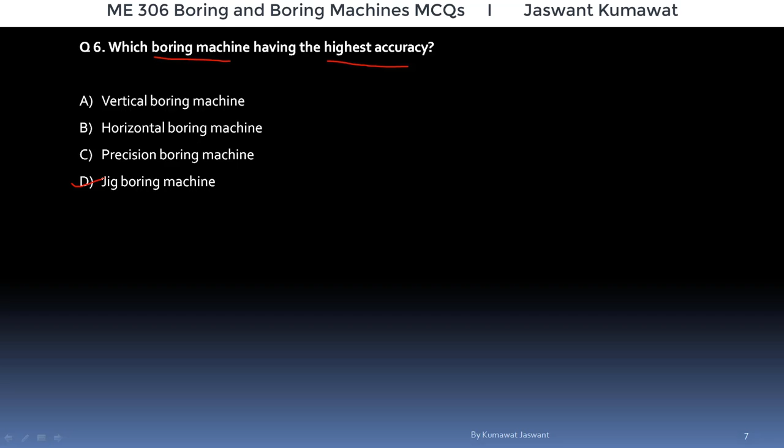Next question, number of cutting edge or cutting edges that can be used as cutter of a boring bar is.

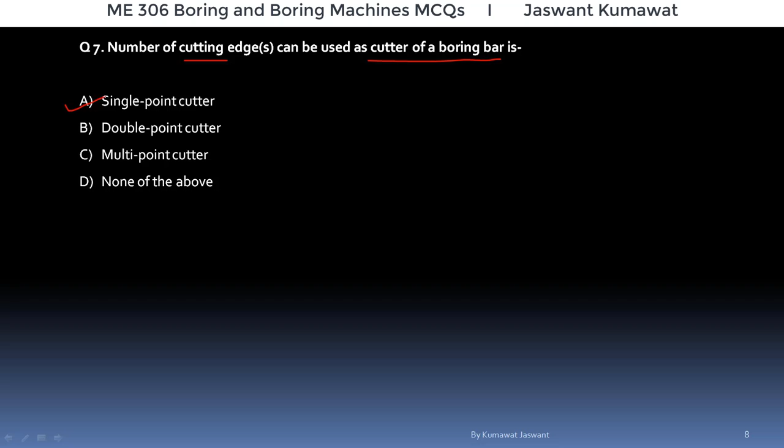So here correct answer will be option A, single point cutter. Here it should be also noted that while doing boring with boring heads, we can accommodate multiple number of cutting tools on boring heads. So if we talk about single cutter, then it is single point cutter, and if we want to know the number of cutting edges, then we have to tell the number of cutting tools accommodated in the boring head.

Next question, maximum spindle diameter of a horizontal boring machine is.

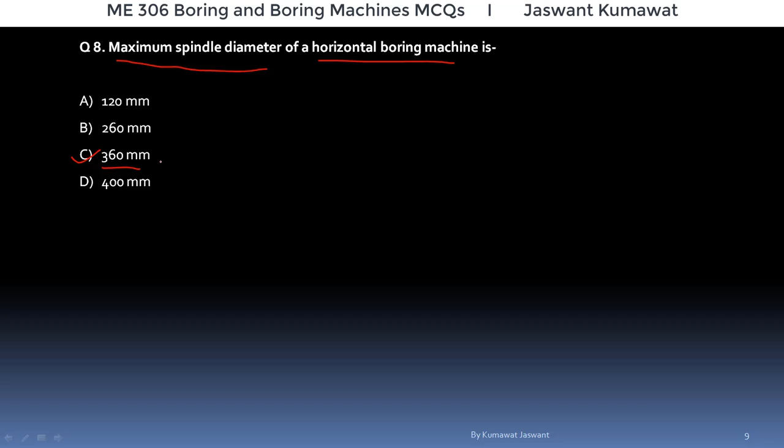Now next question, maximum diameter of machine table of a vertical boring machine is.

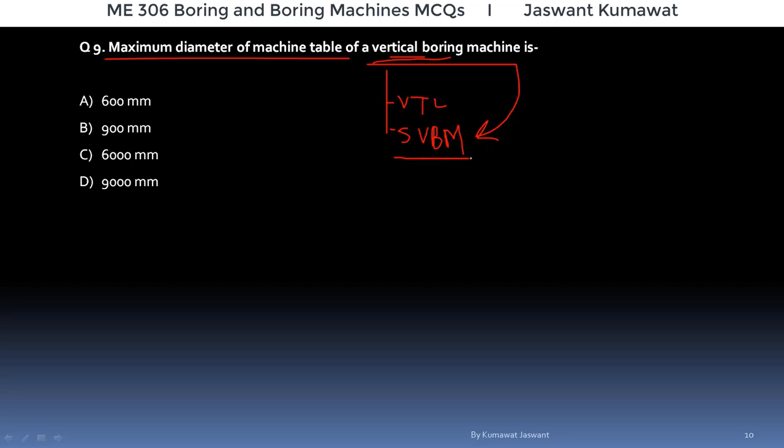When we talk about diameter of table in vertical turret lathe, it can vary from 600 millimeter to 2000 millimeter, while the diameter of table in standard vertical boring machine may be as high as 6000 millimeter. So we have to find the maximum diameter of machine table of a vertical boring machine. When we talk about vertical boring machine, generally we are talking about standard vertical boring machine, so we have to give our answer according to that. So C is correct answer. 6000 millimeter is maximum diameter of machine table of a vertical boring machine.

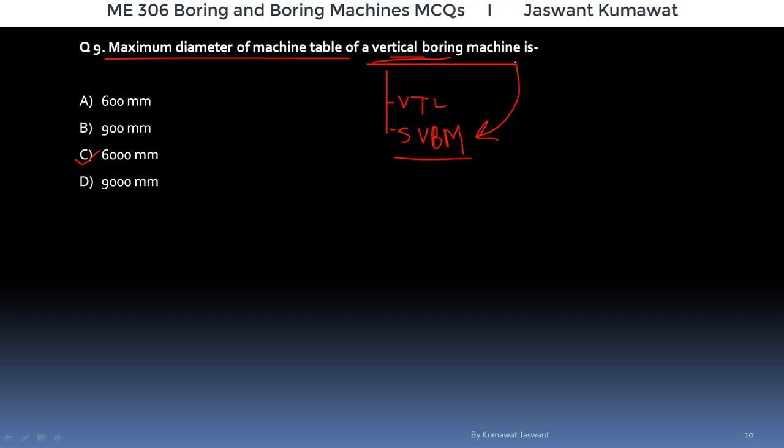Next question. The boring machine is mainly used to bore blank holes.

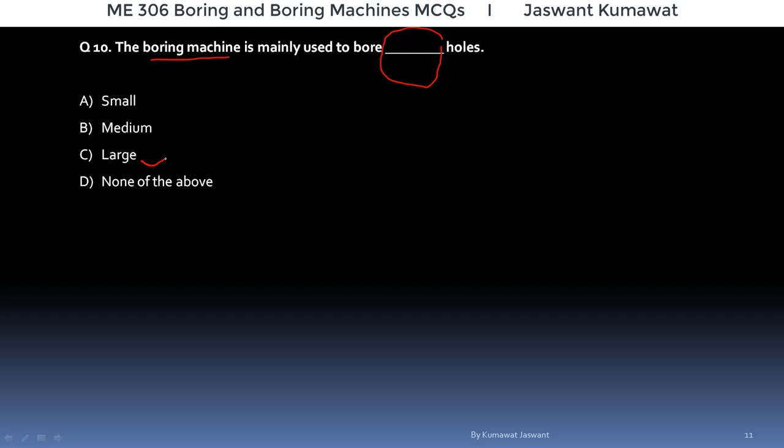...supports the cutter for boring operation on jobs having large diameters. It means which of these supports the cutter? Supports the cutter for boring operation on job having large diameter. Two conditions are given: to support the cutter, and for jobs having large diameter.

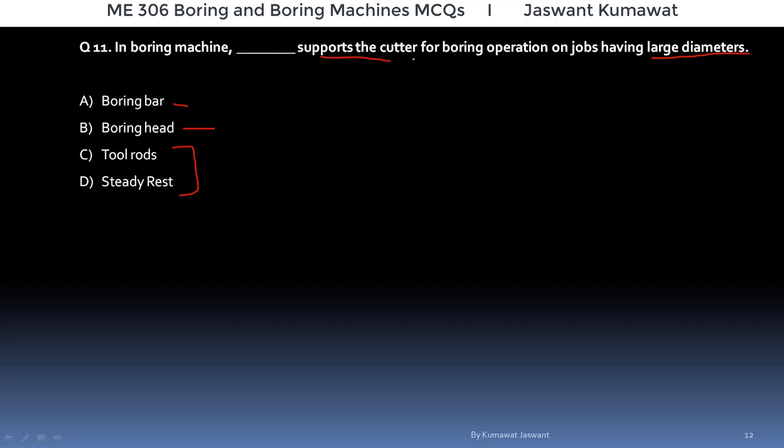We know to support or mount the cutter in boring operations performed on boring machines, there are two equipment. One is boring bar and another is boring head. These are for mounting or supporting the cutter in boring operation. So we have to find whether it is boring bar or whether it is boring head.

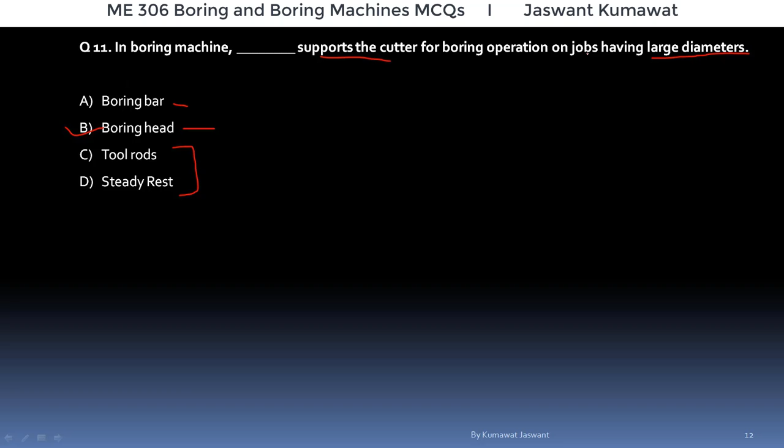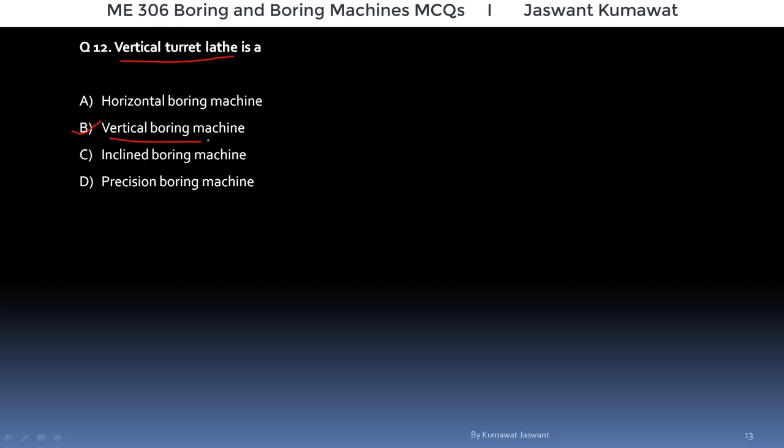...precision boring machine. We know vertical turret lathe is a type of vertical boring machine. So correct answer is B. There are two types of vertical boring machine. One is vertical turret lathe. Second is standard vertical boring machine. Vertical turret lathe is limited for smaller workpiece, or it is having small size, while standard vertical boring machine is for boring operation on large or heavy workpiece and its size is very large.

Next question. Boring tool is mounted on. Options given are boring bar, boring head, all of the above, none of the above. We have studied that boring tool is mounted on two equipments in horizontal boring machine, that are boring bar and boring head. Both are used to mount the boring tool in horizontal boring machines. So here both of these are correct, and all of the above is given. So correct answer here is option C.

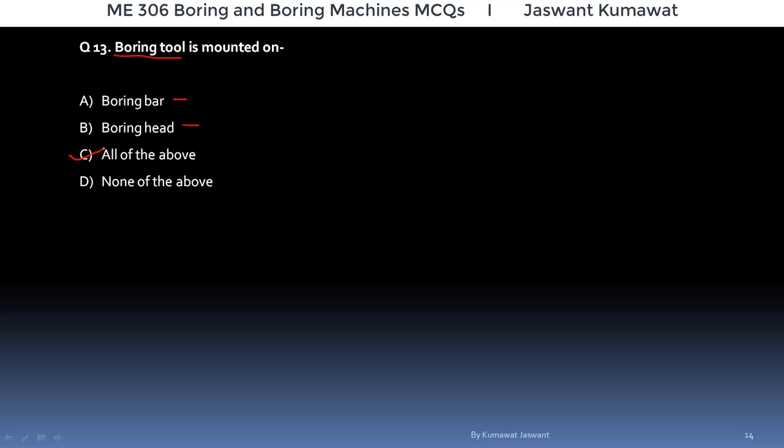Now next question, which boring machine is used for machining surfaces rapidly as well as accurately? Options given are horizontal boring machine, vertical boring machine, jig boring machine, precision boring machine. High accuracy can be obtained with jig boring and precision boring machines. We know in jig boring, due to locating the holes or measuring the distance, it is time consuming, but precision boring is used for machining surfaces very rapidly. So the answer that matches the given question is precision boring machine.

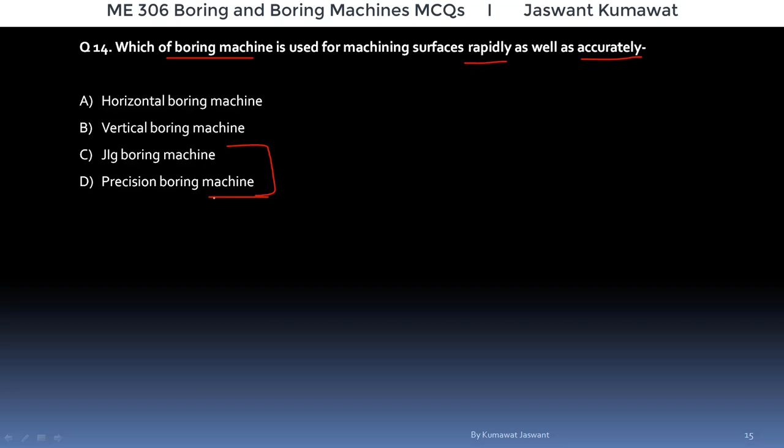Correct one is D. Next question, in a boring machine, headstock and end supporting block may be moved. In a boring machine, headstock and end supporting block may be moved.

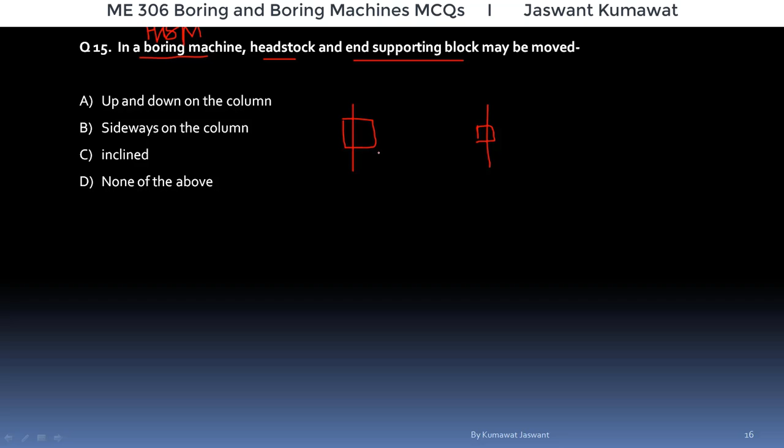As we have seen, in horizontal boring machine there is a headstock column, on another side of table there is end supporting column. On the headstock column there is headstock, while on the end supporting column there is a bearing block, and these headstock and bearing block can be moved up or down on the column. So correct answer here will be up and down on the column. Option A is correct. Sideways on column, it is not true. Inclined, not true. None of the above, not true. So correct one is A.